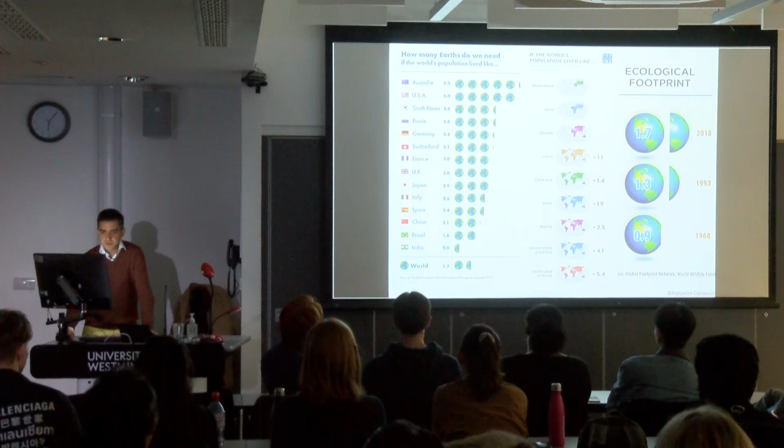That's the difficult bit here—especially if we just focus on the construction industry. What is that kind of radical change? Is being sustainable a radical change? I don't think so, because if it was, we would have been there by now. So how many Earths do we need? If we carry on like this—you've probably seen stuff like that—it's just nuts.

So where do we start as architects, as designers? It's overwhelming—there's so much stuff, so many materials, so many products out there, so many claims. How can you do the right thing?

I would suggest that the most important thing is to start from one of the most common building materials we've got on Earth, and that's actually what's beneath the topsoil. Beneath the organic soil you've got gravel, silt, clay, and sand. In a way, this is the backbone of what we should be building with, and it's critical because it's a local resource.

So our task now is to find, very quickly, various ways to produce building products out of that mass—but in a way that the mass can perpetually be reused. So you don't make a product that then has to go to a landfill, but actually keep the material in its raw state. This is a map of the different soil types across the world.

You can see the process from the immature soil, where it's like bedrock and rock, and through various processes like rain, the breaking down of the rock and the forming of all these different layers. It's a very complicated geological process—chemical, mechanical, and all sorts. But basically, this is the base, and we are working in that area, where you find your gravel, sand, silt, and clays.

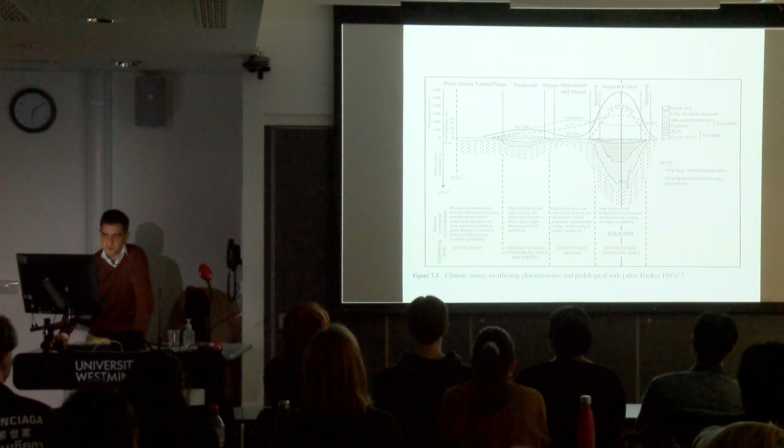Just to give you an idea, what have we got? We've got sand, which is a certain size, there's the size of the silt, and there's the size of the clay. So the clay is very, very small, but it's fundamental.

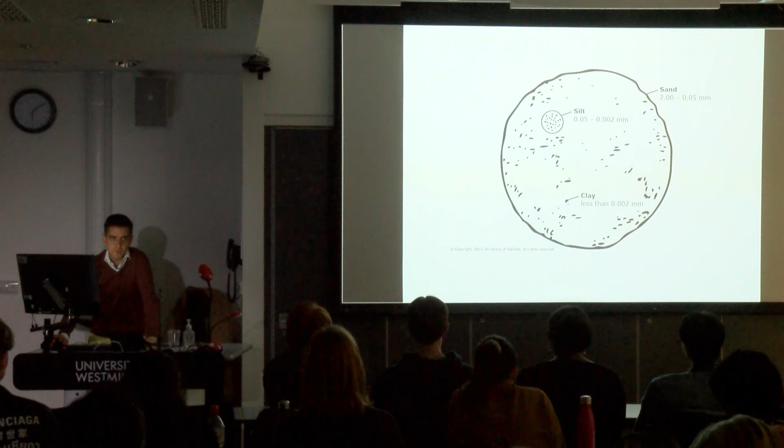That's your cement, if you like, basically. This is how you make your clean concrete. The clay is your binding agent, and it's very important. We'll probably touch on it later on, but they're very different.

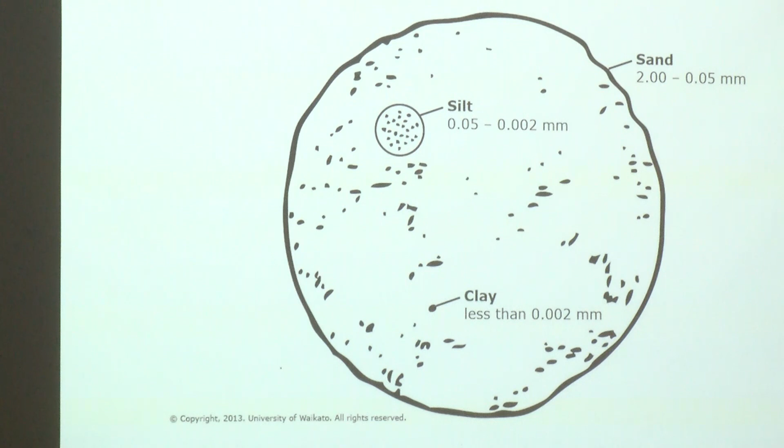There are different types of clays, and clays have been created in different ways - there are three different ways that clays are created. It's also important to think about the clays as being flat plates rather than tiny grains.

And between the plates, there is always a thin layer of water, and actually that's quite important. So there's always a kind of active element in the clay. And as they interact with other particles, they start to interlock.

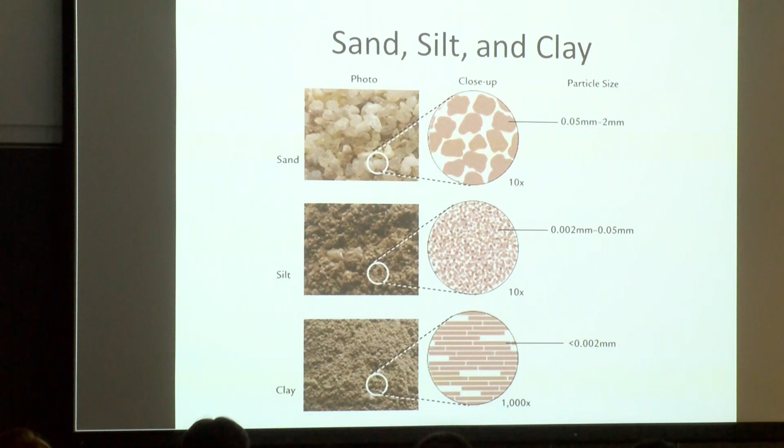So in earth construction, this is a diagram where the big round discs are sand, and these are your clays, and the bigger parts are silt - silt also varies in size.

The basic principle for earth construction, whether it's rammed earth wall or earth bricks, etc., is compacting of the voids. If you've got a pile of earth, it's got 50% voids in it as it's dug out and stacked in a pile. When we compress it, let's say in rammed earth, when we're ramming it, we go down to 30% voids. This is how we get the strength in the blocks.

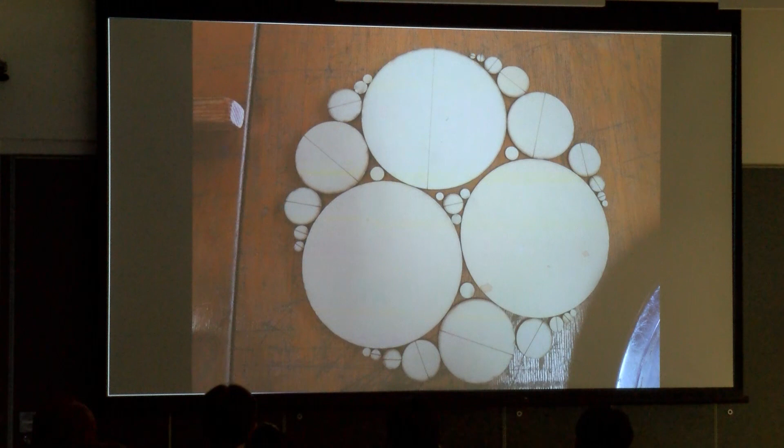So moving on to sand, and I would recommend this book to absolutely everyone. This is what you need to read next week, or this week, or tonight. It's so important - I wish I was given this book when I was in my first year, or it wasn't written back then. The title is probably a little bit misleading. I read articles about it, and then I came to purchase it and read it. It doesn't feel that the title communicates actually what it really conveys.

If you now Google 'world is running out of sand,' you find lots of articles. I think especially around 2018 there were lots of articles about it. But as usual, a lot of them are inconclusive - it's like, oh, why is it the issue, etc.

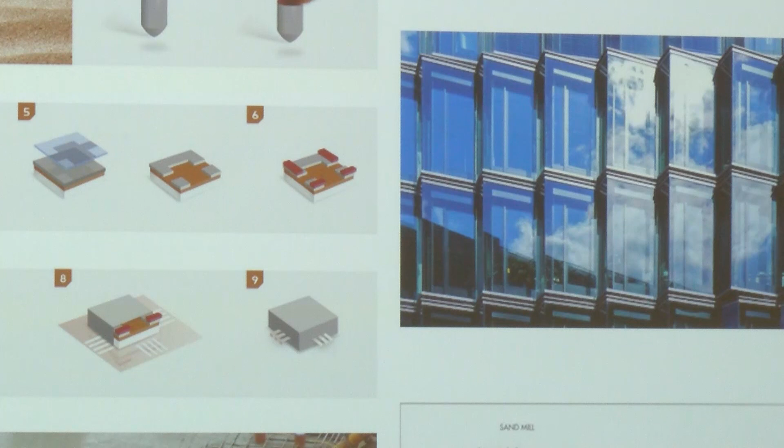Going back to the book, and that's the first chapter, the first sentence: sand is the most important solid substance on Earth, the literal foundation of modern civilization. He goes on to say basically, whether it's abrasive products, ceramics, chips, glass, concrete, you name it - everything that we touch or come into contact with has some kind of sand content in it.

So why are we running out of sand? Global use of sand is set to soar - you can see here in billions of tons, close to 30, and it goes even further. You can see actually against other commodities where we stand. It's absolutely insane, and it goes down to lifestyle.

If you think of the 1900s, the majority of the world, how people were living and what they were using - there was this kind of contact with nature, and we weren't surrounded by stuff, concrete and buildings everywhere, so they didn't have that issue.

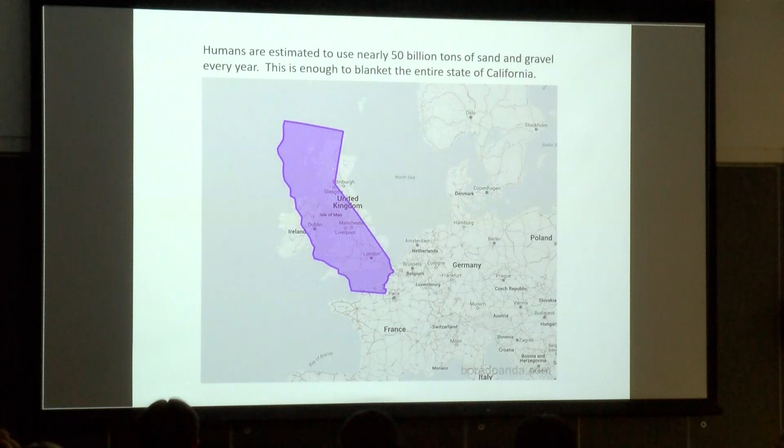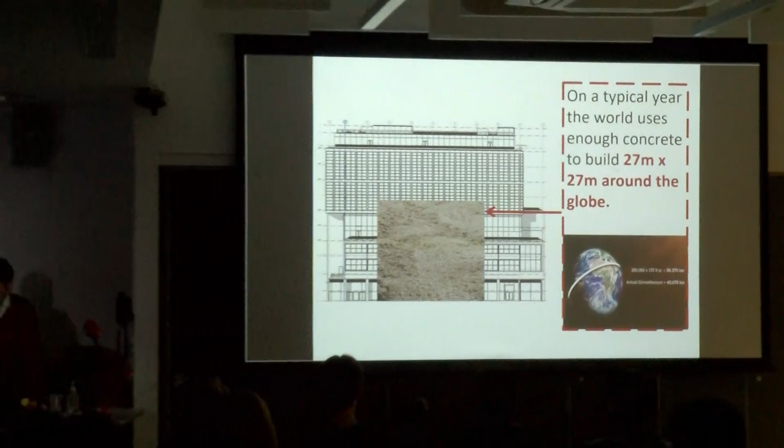But now humans are estimated to use nearly 50 billion tons of sand and gravel every year. This is enough to blanket the entire state of California - the purple here is the state of California, so you can imagine what we use every year of sand. That's the equivalent of spanning the world in a 27 meters by 27 meters dense wall of concrete every year. Can you imagine how much concrete we pump out?

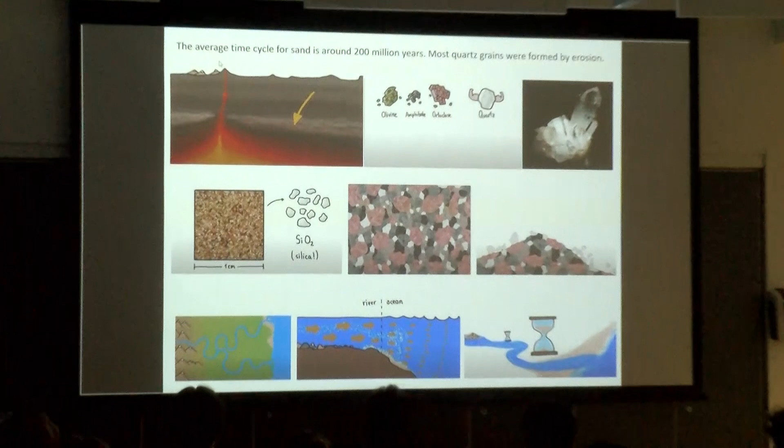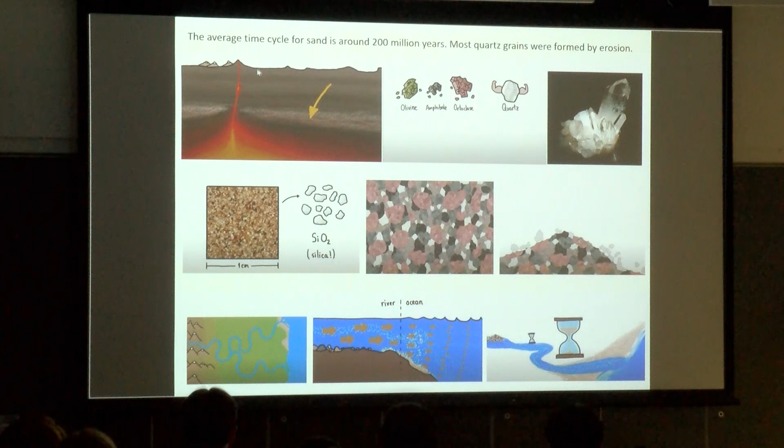Average time cycle of sand is around 200 million years. Mostly quartz, formed by erosion. You can see the journey of sand, the way it starts from the mountain, then trickles down the valley and gradually forms into small particles of quartz. It falls off a larger rock and is deposited in the valley of a river. So it's a 200 million year cycle, and we just take it and use it in a one-off way, glue it into concrete, and it's lost forever.

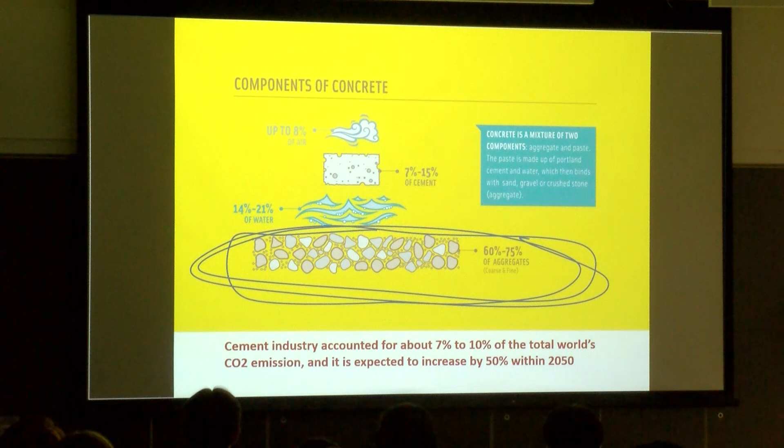There are different types of quartz and silica, different types of sands, which we use for different purposes. Going back to concrete, the real issue is the insane volumes of CO2 we emit every year.

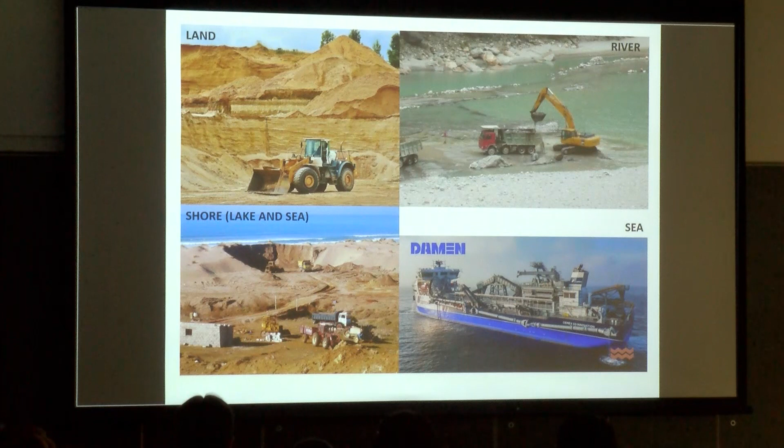Some examples of sand extraction. The sea is now very, very common in the UK, and not only in the UK. Though the supply may seem endless, usable sand is a finite resource like any other. Desert sand does not work for construction, it's too round to bind well together. So this is the current way a lot of our sand in the UK comes from, dredging the seabed with a huge hoover, which has huge environmental impacts, and the embodied carbon of running that operation is significant.

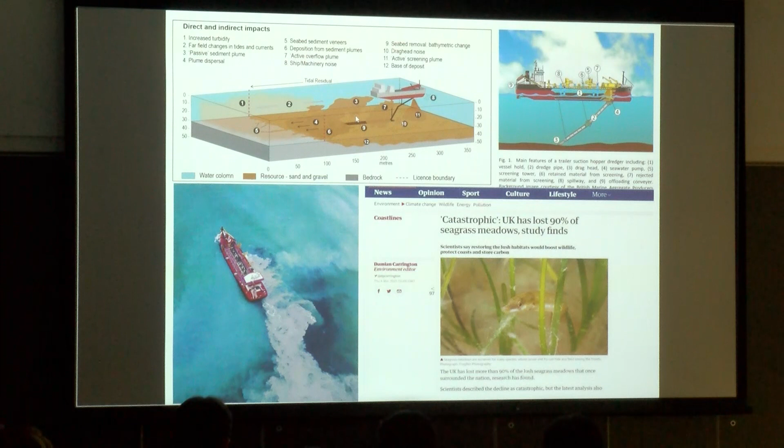At the turn of the last century, modern concrete was thought to be as permanent as the stone it mimicked. None of that turned out to be true. It's down to the chemistry of the concrete. There's an inherent weakness bound to its chemical formulation, but also the fact that you've got reinforcement inside.

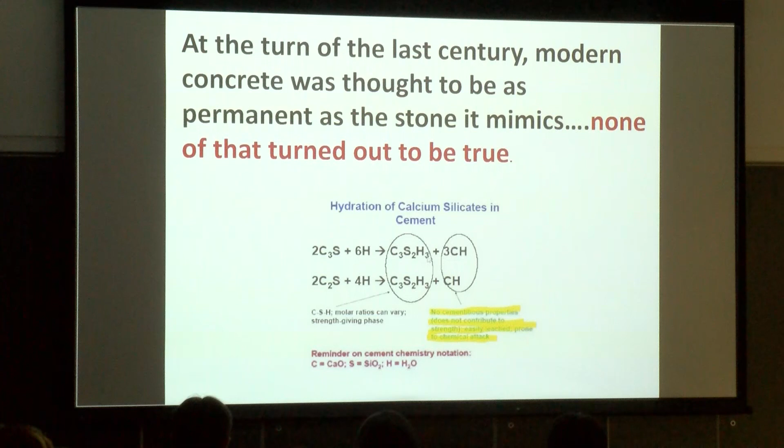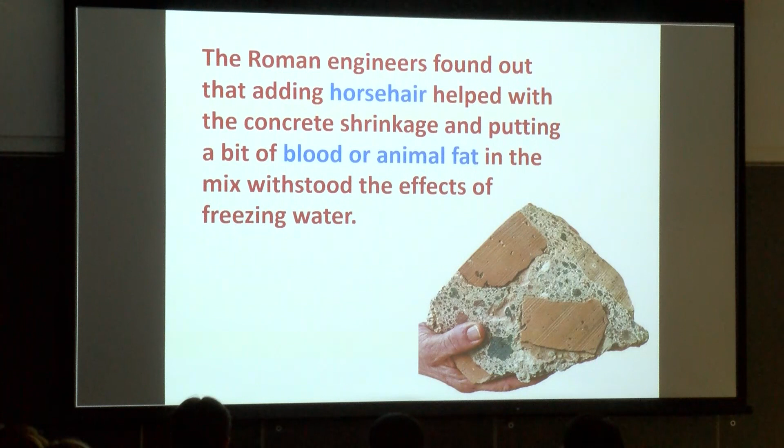When we compare classical concrete structures with modern structures, we're not really talking about the same material. The chemical makeup and the way it weathers is very different. The Roman engineers found that adding horsehair helped with concrete shrinkage, and putting a bit of blood or animal fat in the mixture withstood the effects of freezing water. You wouldn't give this specification to your structural engineer today.

Modern concrete fails and fractures in dozens of ways. Heat, cold, chemicals, salt, moisture, all attack that seemingly solid artificial stone, working to weaken it and shatter it from within. You've probably seen this weathering of concrete on bridges, underpasses and buildings. It's referred to as concrete cancer, where moisture gets to the reinforcement and it starts to rust, expand and contract, and it basically shatters.

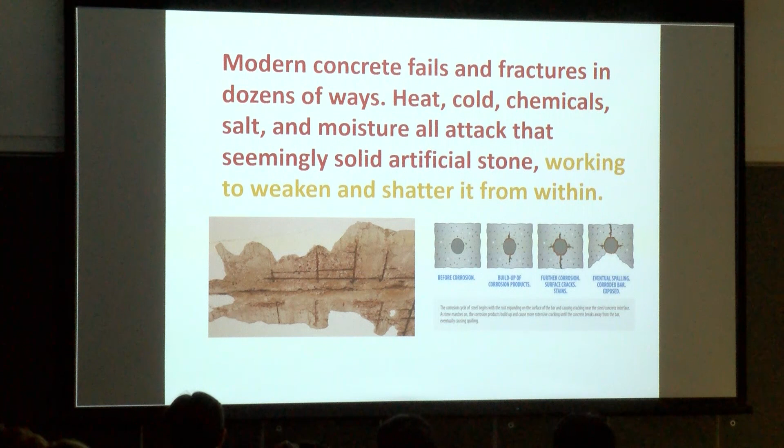The disease that will kill your reinforced concrete depends on where you live, with various examples in cold climates. These are extracts from the book, so when you buy it and read it, you'll see it yourself.

Can sand be recycled after it's been used in concrete? Yes, but you end up with a very low quality aggregate which isn't really suitable for most things, and it's very expensive.

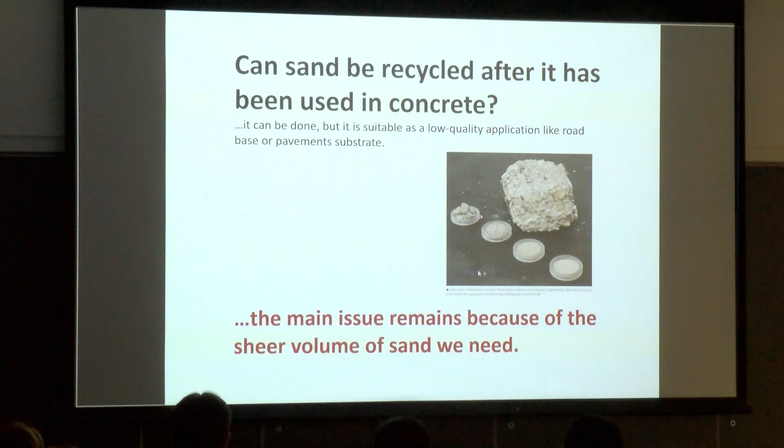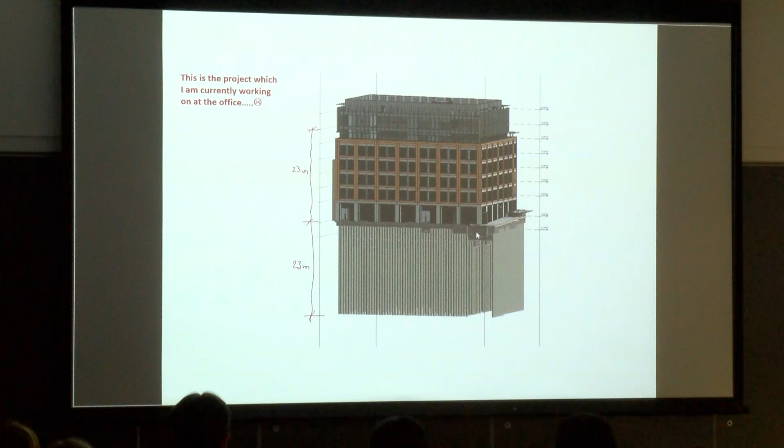This is the project I'm currently working on at the office. As I give you this lecture about not using concrete, this is what I'm currently building near King's Cross. As you can see, the foundations are almost as high as the building, and they're all concrete. Not very happy about it, but we'll come back to this one.

I want to move back a few years to 2017. I used to live in Devon, and I moved there with my family trying to do the right thing, be green and all that, had an electric car. I wanted to do an eco self-build, so I started a project to build as green and affordable a house as possible. I looked into what's available there.

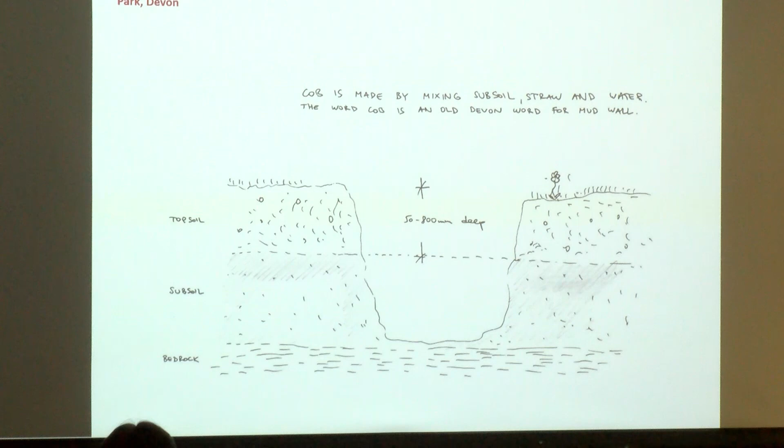You've got timber, turf, water, straw, subsoil, and then inevitably I looked into cob because cob is also local to the area. That's how I familiarized myself with earth. You find your subsoil about 50 to 800 millimeters beneath the topsoil, then mix it with straw and water, in different proportions depending on how much straw, subsoil and water you need.

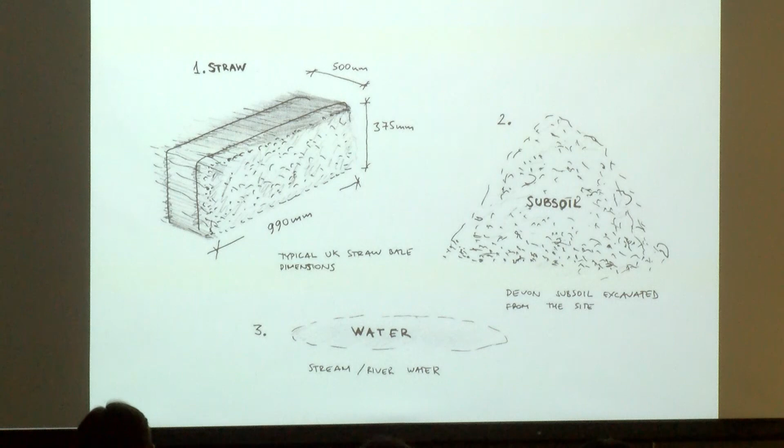Then you get into the technical details. That's quite important, because when you move away from conventional ways of building, you really need to become an expert, even if you're not one. You need to know more than the experts in order to avoid any risks associated with unknowns.

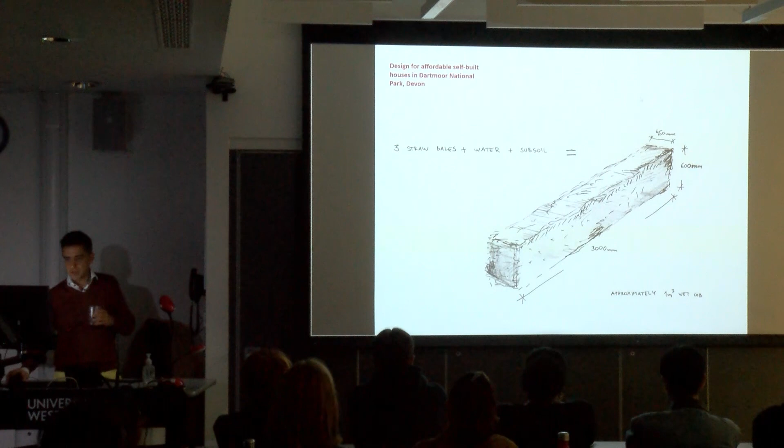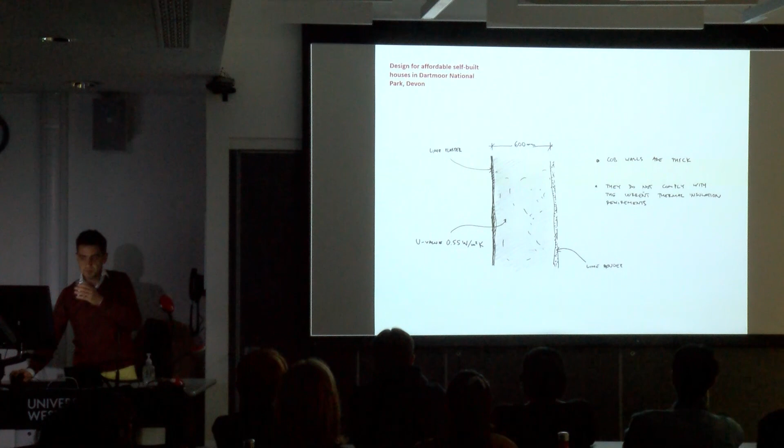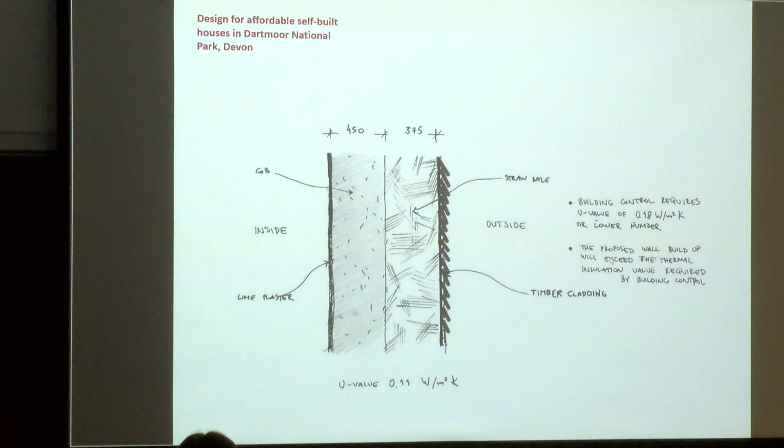So with the structural engineer, we came up with a 450 cob wall, straw bale insulation on the outside, and timber cladding. This would give us a 0.11 U value, which beats what building control wants. Then we looked at the roof, the thatch roof.

The locally thatched roofs now are too expensive. It's a fortune - you need to spend every 5 to 10 years, 20 grand or more, to replace it. We just said no. So we looked into turf roofs instead, because you can get the turf from the site, and it lasts 30 years.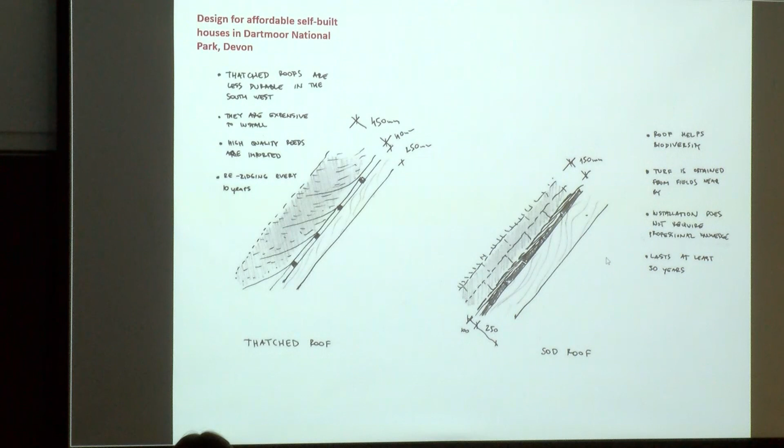Then some basic principles: obviously to keep the cob wall dry, to have a plinth, a stone plinth, so it doesn't get wet, and a big overhang, which helps with rain and also gives a bit of cover from the sun in summer, as a basic principle for the house.

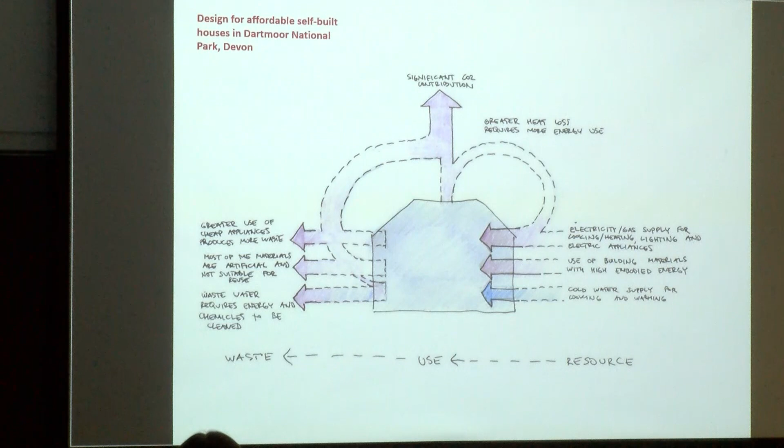Then we looked at what we typically have, like resource use and waste in buildings in terms of electricity and water, and basically just creating, in a way, pollution.

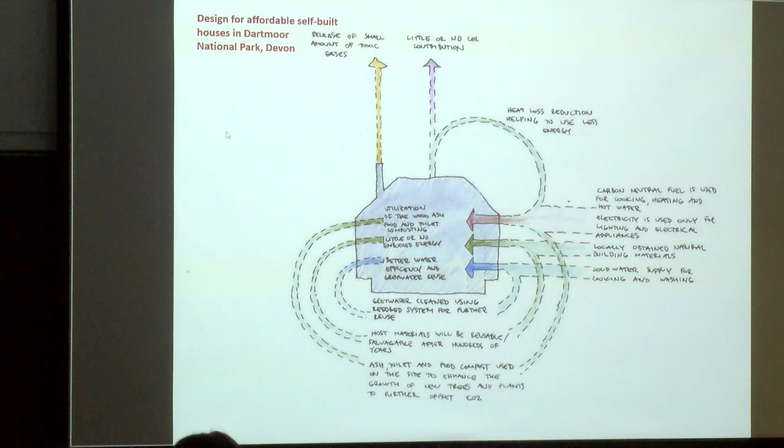So we looked at closing that loop - compost toilet, reed bed outside, and so all those things, obviously to minimize as much as possible what goes out as waste, and then either turn it back into a resource or minimize its use.

This was the plan for the site, 5 houses. So each family was to have a small plot around the house. The rest is for oak orchard - we've got orchard, oak plantation, wild meadow - so basically it's all about boosting the biodiversity.

Replanting pretty much the carbon that you've emitted. So over 30 years, it reabsorbs it through what you've replanted. And in a way, again, you balance things out.

We also had an ecologist on that job, and she did a scheme showing that by doing this on the site, you improve the biodiversity compared to just having a grass field - because of the ponds and all the things that are done and planted. So in a way, that's a benefit as well.

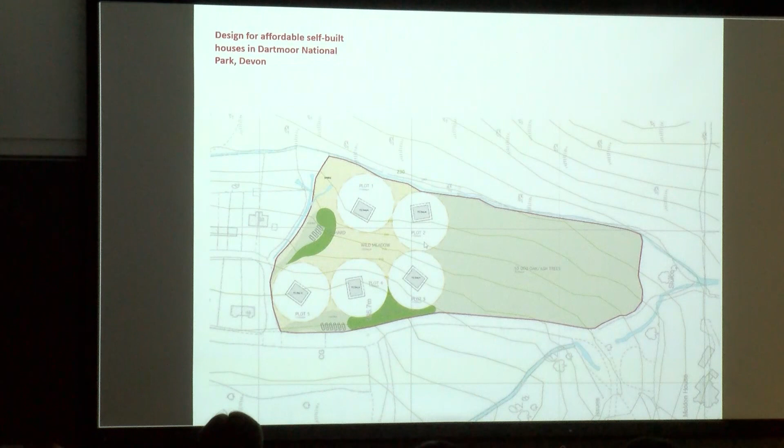But we went to pre-app. Then the planners stabbed us in the back, and then the parish council also stabbed us in the back, and that was when we decided to come back to London.

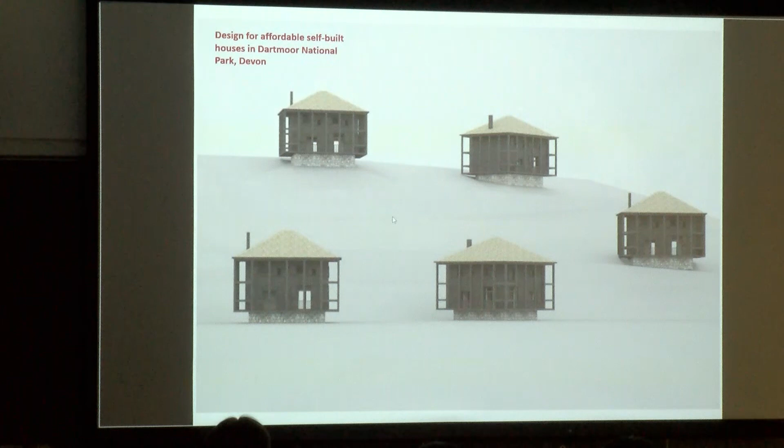That was the diagram of what the house would look like.

Is earth construction scalable? I'll show you another competition I did a few years ago for a university building in Sofia. With the engineer, we looked at the soil beneath the excavation, and it was good for rammed earth, so we wanted to do rammed earth walls, attached to a superstructure which is timber, glulam timber internally.

And then we had a proposed reed board insulation and earth screeds as well beneath the floor tiles everywhere, so again minimizing the use of cement-based materials.

That was interesting, actually. That competition, we came fourth, but then the first three should have been disqualified. But then it was Bulgaria, so it didn't matter.

So we didn't win. I'll show you another competition, which I did with Atelier 10 and Expedition Engineering. So this is for an art gallery in Finland.

Here I would like to focus on the fact that the way you design for regenerative buildings has got to change. You can't just use the same design methodology as modern buildings, the business as usual approach. It's different - you need to first design the material system for your building, then start shaping things out, and think of what can go where. It's very different than coming up with some idea, some shape, and then trying to plug things in.

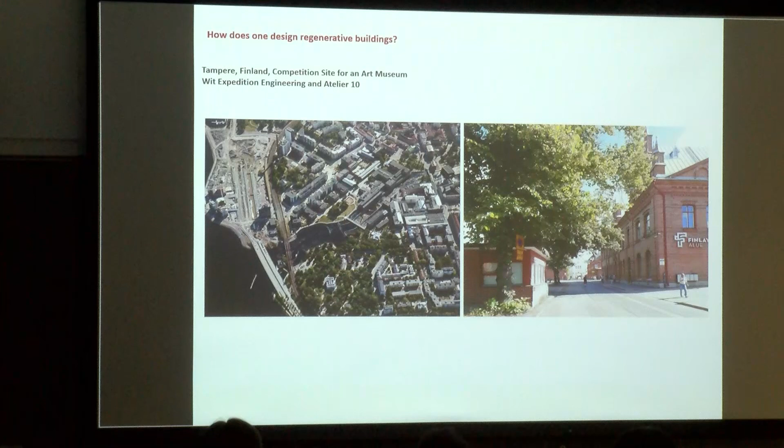So yeah, that's the site. We looked at the site. Tampere is located on an esker, which is between two lakes. The soil - esker is where glacial water carries sand and gravel. We tested from the available information, looked at the sand and the gravel there. It was good for earth construction.

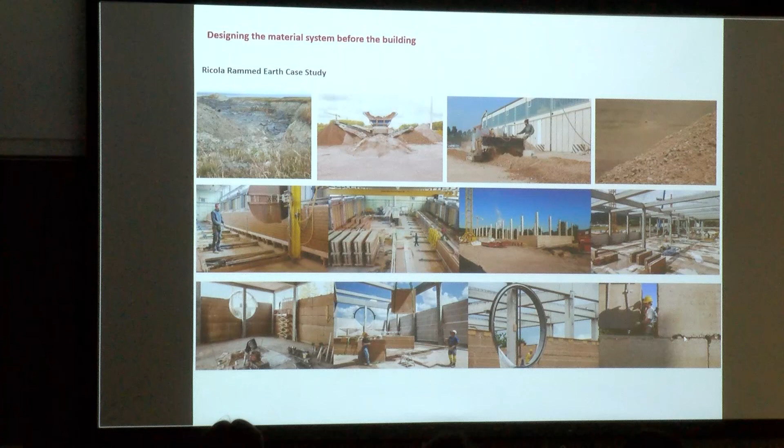So we wanted to do basically what Martin Rauch does - if you don't know him, look him up. He does amazing work, he's got this mechanized way of making rammed earth panels. We proposed the same methodology and same kind of use of material. You make about, I think, 450mm thick round panels that are lifted into place, and then you close the gaps with earth mortar, and they mostly disappear.

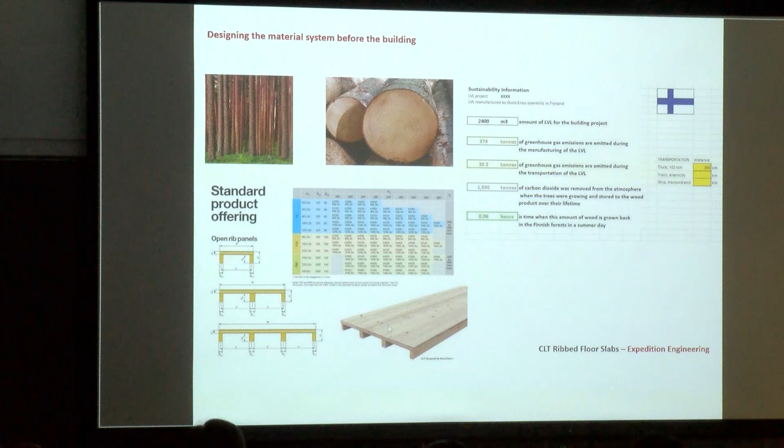Then for the superstructure and for the floors, we looked at ribbed panels, which are better than CLTs because they're more efficient. We saw what spans were possible - I think about 7.5 meter spans. And then also for the foundations, round rock with a vibro system, rather than concrete.

For the insulation, we proposed these structural panels made of hemp and resin, which actually aren't available anymore. Post-Grenfell, they're no longer on the market because the testing regulations for fire are now so insane that even sensible products can't make it. Just because it's got resin, it's too much of a composite material, and companies can't afford to do the tests every few years. But anyway, that's what we proposed back then. The insulation levels were very good, and carbon-wise it's also very close to zero carbon.

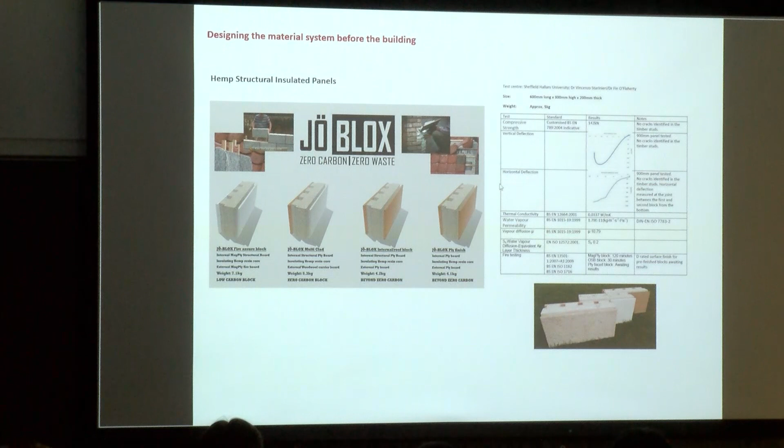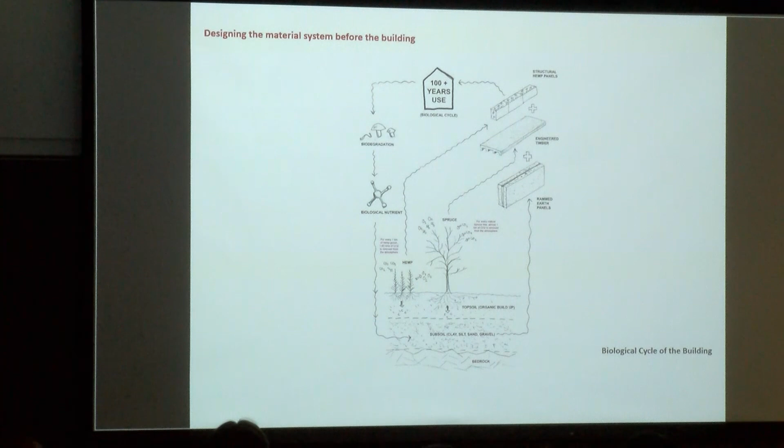So that's the diagram of resource-based design - you design your material system before the building. You find your ingredients, your components. The whole idea was that they're either biodegradable or the resource is retained within the material for further reuse. For initial sketches, as I said, really without even thinking of program, just to see what you can do with that material system in a reasonable way - in terms of plan, sections, and spans.

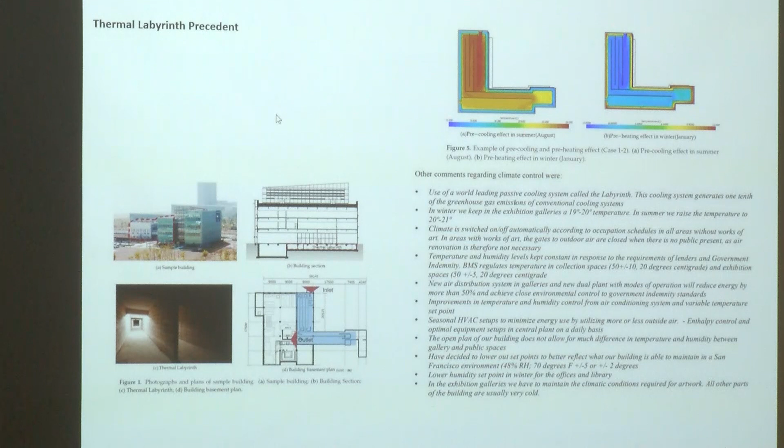Then Atelier 10 proposed thermal labyrinths beneath the ground to cool and heat the air in summer and winter, in order to minimize energy use. We also looked at making soffit panels out of earth as well, which help with internal humidity and also reduce carbon.

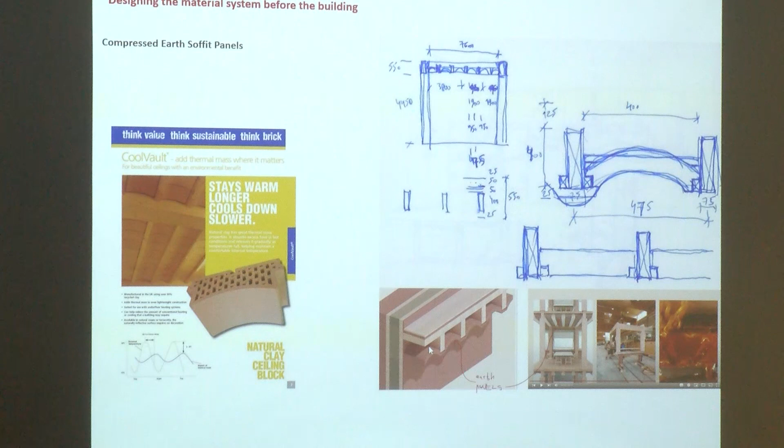So that's a plan view - you've got your rammed earth panel, you've got the hemp panels, which are sandwiched between timber. That's the section, and this is how the floor connects with the ring beam, and this is a cross section through the floor with the soffit panels. So that's all your components for the wall and the floor.

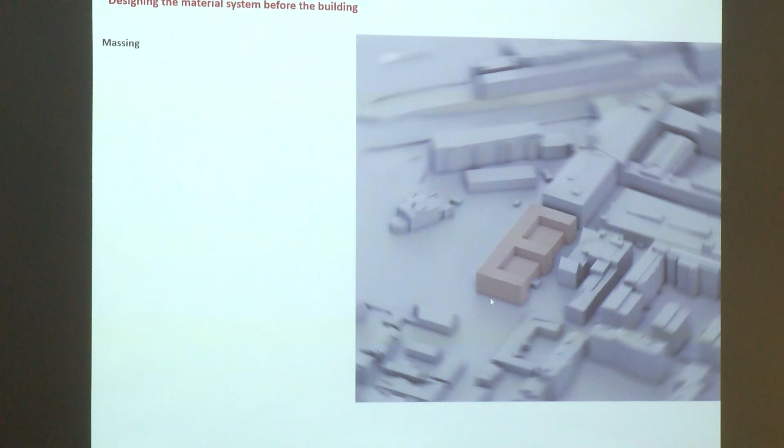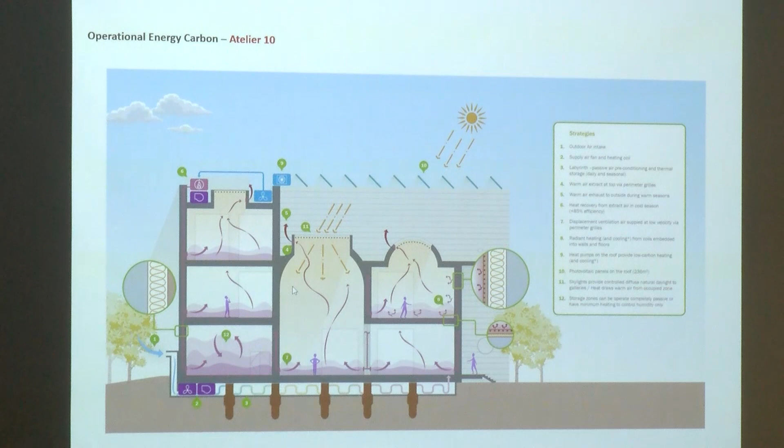And this is Atelier 10's diagrams - again, they did really well. Air comes via those labyrinths beneath the slab, it's distributed internally, then it's captured and recirculated again, with the heat recirculated. So that's their summary of the scheme, but it performed really well - very low energy demand, etc.

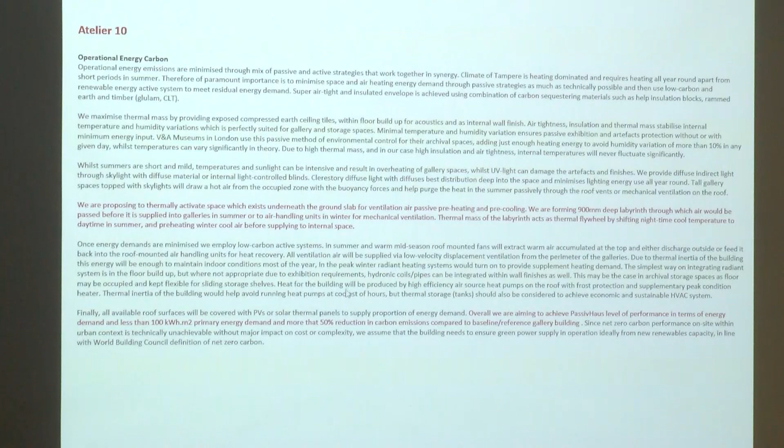So this was their carbon analysis - you can see basically here, from the 417 kilogram of CO2 per square meter, the percentages of where the carbon is: 3% for the PVs, 22% for the CLT, 15% for building services, and you see 4% for the local rammed earth facade.

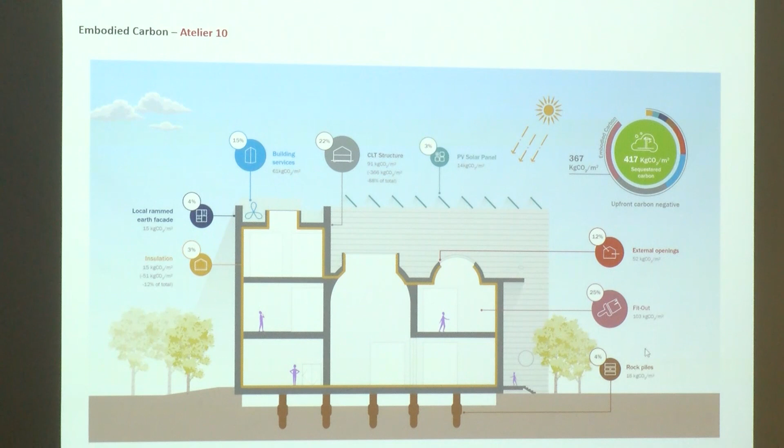That's what we were just saying, it's so important to bring earth products within your building. Here's 4% rock piles - usually the majority of your carbon is in the superstructure and foundations.

This is again the summary of the carbon. The shocking thing was that after all that, we came out at B. This chart shows A++, where we should be kind of zero carbon - the new building should be here. But after all this, you still come out at just about A, between A and B. So you can imagine business as usual buildings, even with their claims, where they venture, and how much further everything needs to be pushed to get there.

So that's very important to keep in mind - even if you do everything, and this is really pushing it, that competition entry was really pushing it within reasonable limits. But it's a hell of a task.

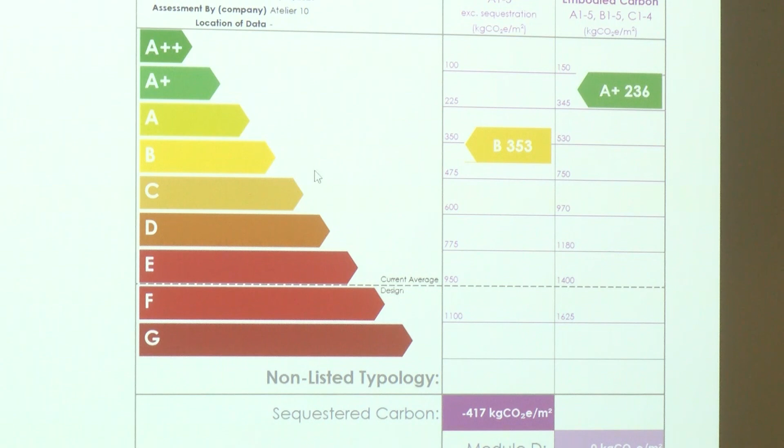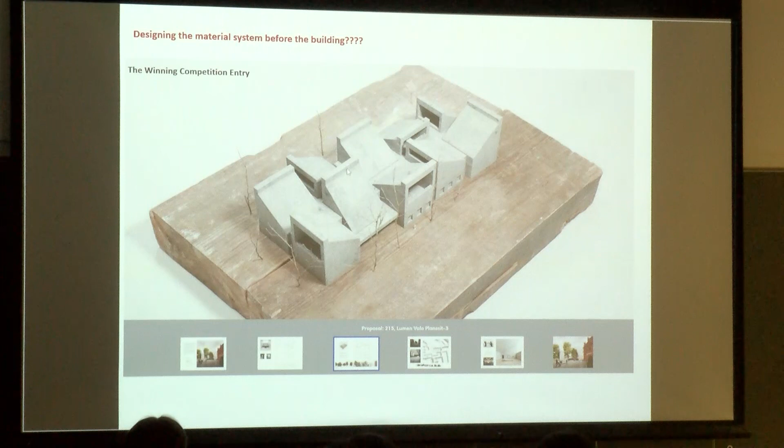This is the winner of the competition, and you can really see it - I kind of just imagine concrete bunkers. There's not many materials you can make this of, and the whole aesthetic was really based on this kind of concrete, which is a real shame. I think our competition entry did really badly, actually - from 500 entries we were probably 420. I don't know, but never mind.

So back to the project I'm currently working on. What can you do? What can you do in order to get there or start going in the right direction?

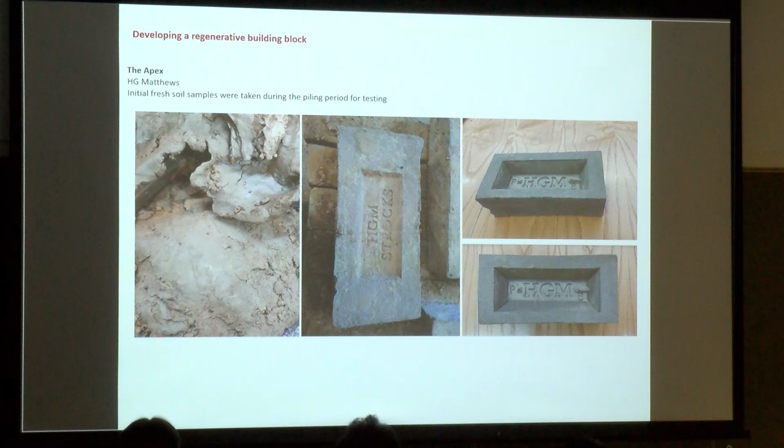Going back to the earth and doing the site investigation, seeing what type of earth we have and what we can do with that - we can make blocks. So we've got some concrete blockwork in the basement, and we want to replace it with earth blocks made out of subsoil from the site in King's Cross.

It was a long journey. I first had contact with Rowland Keable, an earth construction specialist. He said go to your contractor and just, as they're piling, ask him to give you a few bags of freshly pulled clay out of the ground, which is really unusual of course. So I did that, and they were quite amenable. I said okay fine - it was a bit weird.

So he gave me the soil, and I sent it to him. He made a small brick. Then we showed it to the client, and they got excited. But the first reaction was, can we sell it? So we said no, look, it doesn't work like that - it's about building on site, etc. So we're getting there.

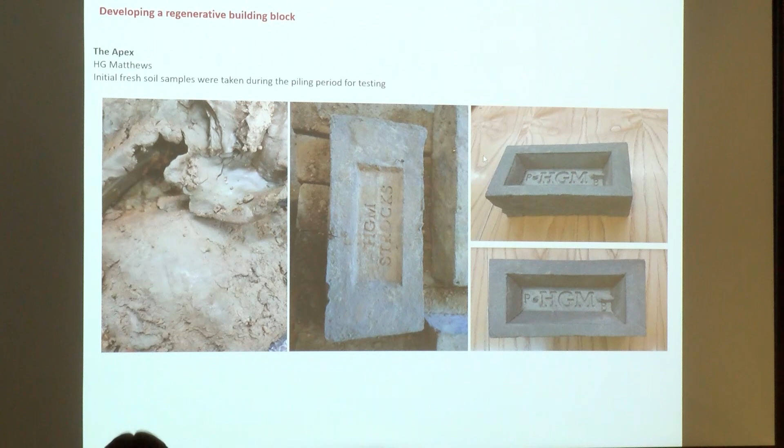It's kind of moving on, and it looks like it's going to happen. So in the basement we've got this orange wall, which goes all the way around the perimeter wall - it used to be concrete blockwork, so now we'll have earth blocks made out of subsoil from the site.

We've already sent the amount of excavated soil we need to the block manufacturer, and they are soon going to start producing blocks. This is what we had before - we checked U values, and it looks like actually the earth blocks are performing better.

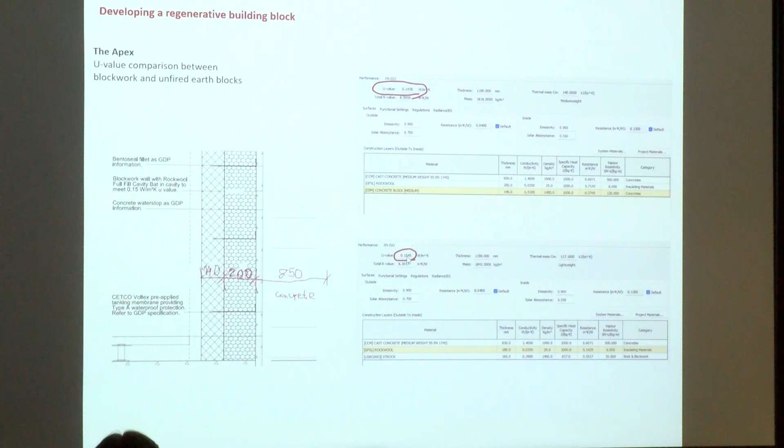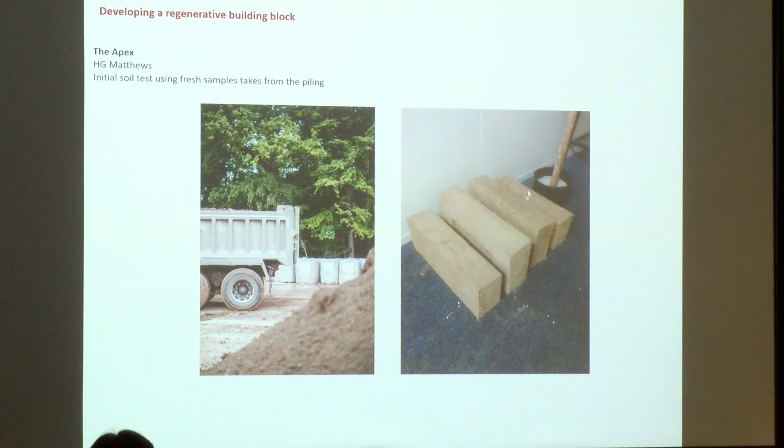These were pictures of the soil being taken away in trucks to go to the block maker, and then sample blocks being made. Starting to go back - a 30-mile journey - then making it into blocks, going to the building, and then perhaps one day they can either turn to ground or be used in another building. The resource is not used up; it's in its kind of pure form.

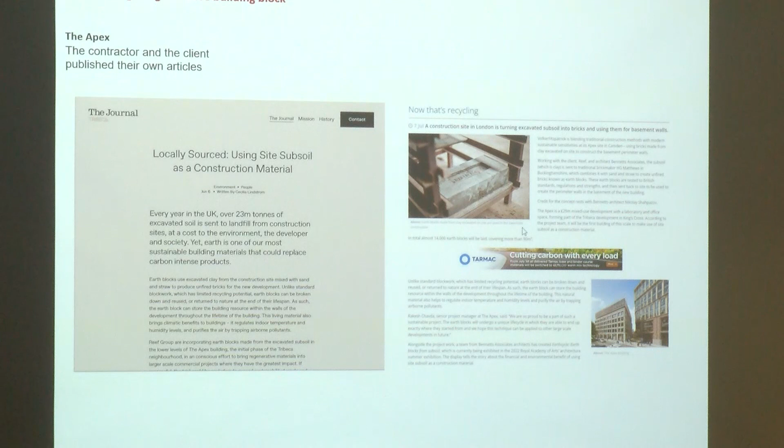So the client ran an article on it - they were quite pleased, even before we actually pressed the button on it. The contractor also did an article on it as well. We made a submission to the Royal Academy Summer Show, and we were selected, so we made a display with the maps and everything else.

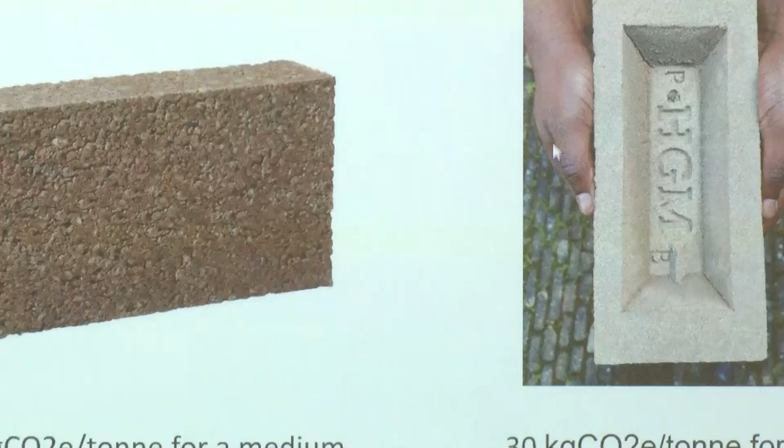So yeah, anyway, hopefully we'll get there. But it's a long journey. And this is basically a disc made out of elephant dung with lime. Again, how many elephants do you need in the UK to build with? It's completely insane.

The problem is that the whole thing about environmental design is being dragged into this ridiculous conversation about things which are really out of the question. And in a way, they divert from things that are really credible and simple, unfortunately.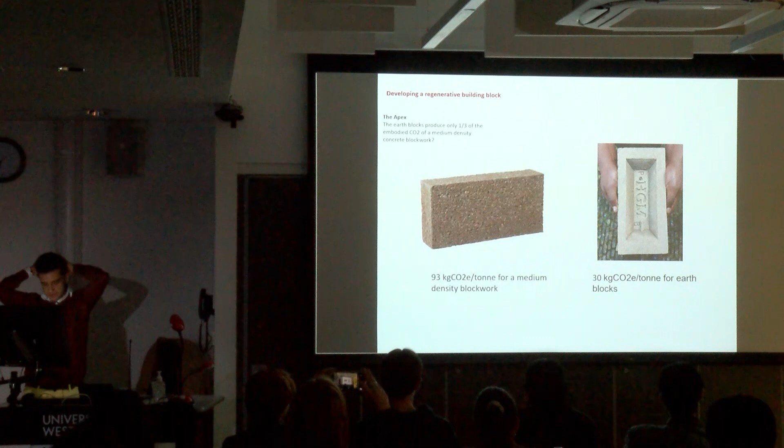So, going back to the earth block, I had a really difficult task to find a way to calculate the embodied carbon of it against concrete block work. The reason for that is concrete block work is part of a very big industry, and also the cement industry, which is part of that. There's so many ways to double account or hide figures.

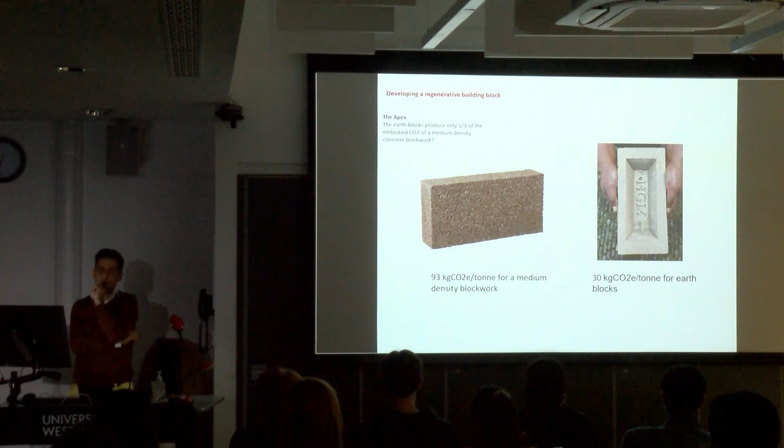They come up with a figure which, when you compare it with something tangible - dig the soil from here, drive it 36 miles so you know how much carbon you use, make it into blocks so we know how much carbon they use to make the blocks, and bring the blocks back - we're coming with a figure that's just a third better than concrete, where the sand comes from the sea, the cement comes from all over, some components from quarries, etc. The cement also emits a huge amount of CO2.

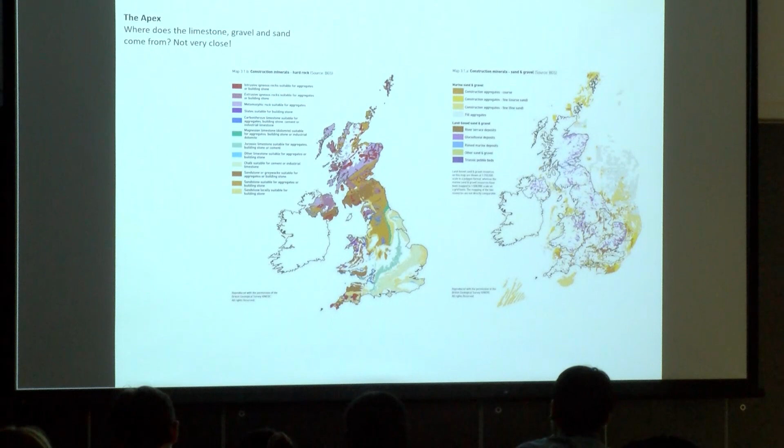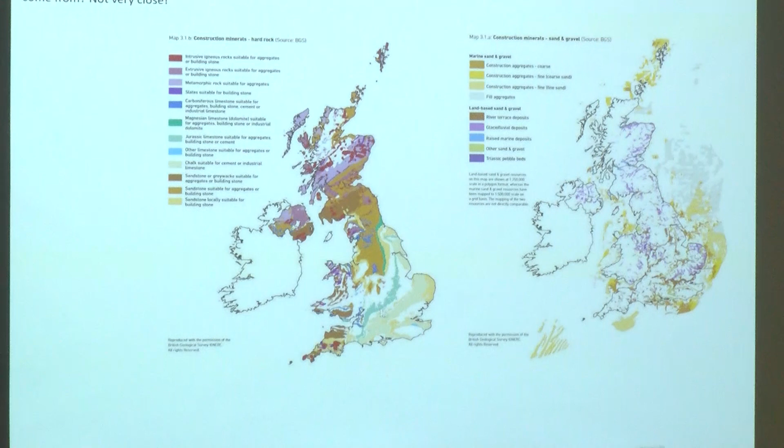So, after a crazy amount of calculations and conversations with various engineers and specialists, insane comparisons and all that, we came up with a figure which now is far, far closer. This is just a map of where all the ingredients will come from for the cement and for the block. So we're talking about a journey which is 36 miles, to basically a journey that could be hundreds of miles, and they're just saying it's a third.

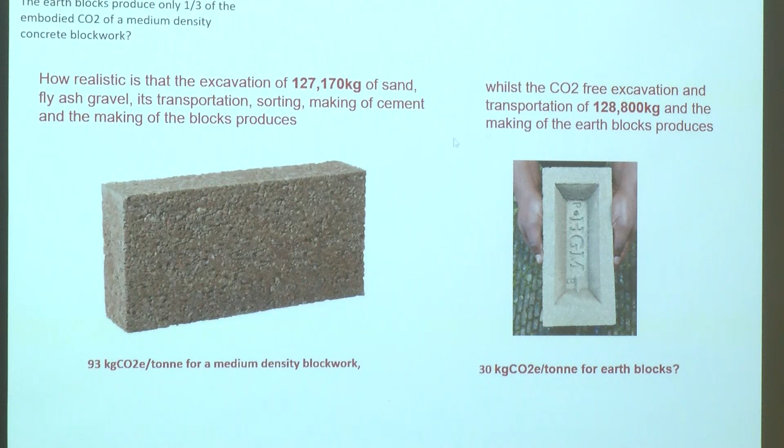But yeah, this is again showing the cycle, the different comparisons between the blocks and how much tonnage of material we will have on site, etc. But the important figure is that it's...

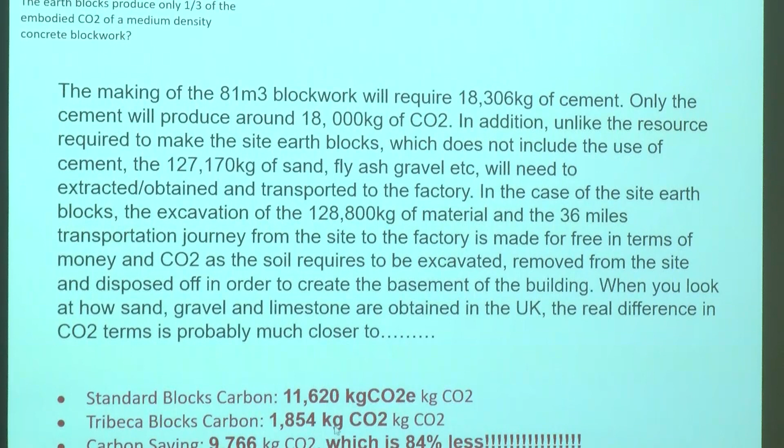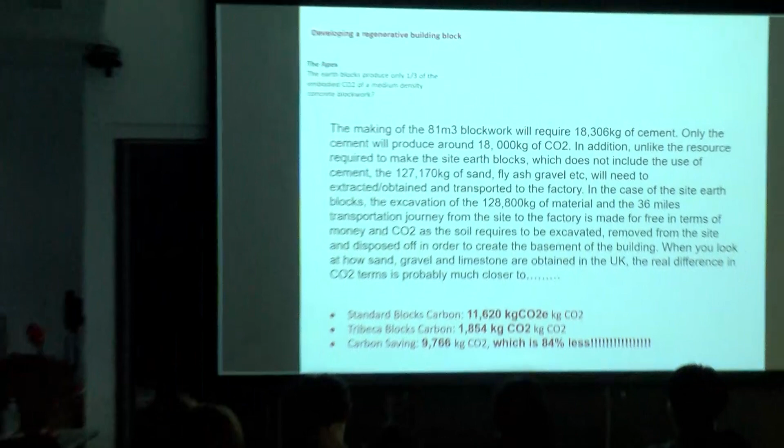1,854 kilograms of CO2 against the concrete, which is 11,620. So finally we came to a figure which is much more realistic. Again, you had to go through so many documents and have really difficult conversations with so many people. And then it's about probably between an eighth and a tenth of the CO2 of concrete blockwork. So you can imagine, that's more radical, that's more likely. If we need to reduce the emissions that we're creating from the materials we are producing, this is like - if everything comes down to a tenth of it, we're getting somewhere.

So, the best way to understand the difference between business as usual and regenerative architecture is by reducing the process of designing and building to its core fundamental materials, i.e. ingredients, which are used in both cases.

I think this is really important. So in your designs and in your work, you need to question everything that you put in your scheme. Where does this come from? What kind of emissions does this create? What kind of impact does this have on nature, on the environment, etc.? And then choosing your ingredients, to start building up your project or designs. But without doing that, without interrogating each one of your main material blocks, you can't get anywhere.

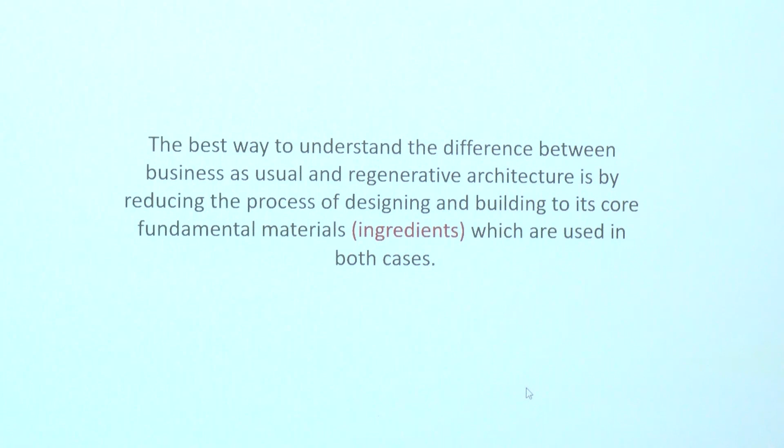We know where we'll be heading if that happens. Only when the core ingredients are clearly identified and the environmental impact is understood can we be certain if the design methodology we use when designing a building is suitable to address the climate crisis. So that's again what I just said - that's the most important thing.

And this is why, for example, on the King's Cross project, it looks simple. Oh, it's just a block. Oh, it's just - you've got the foundations - but that's important because that's one of your ingredients. You need maybe 20 or 30, but that's one of them. So you can get there. You can get one, and then afterwards you can move to foundations.

We've got now solutions for foundations as well. And we can persuade clients, and we can make testing, and move to cladding. So that's very important - not to miss the opportunity to focus on the key elements.

Both the cooking and the building ingredients are part of a production system which leaves its traces on the habitable environment. The comparison between cooking and designing a building is very relevant in this case. If you want to eat well, and if you care about the environment, and if you want to understand where that food comes from and what impact it has on the community or the environment, then you can carefully select your ingredients.

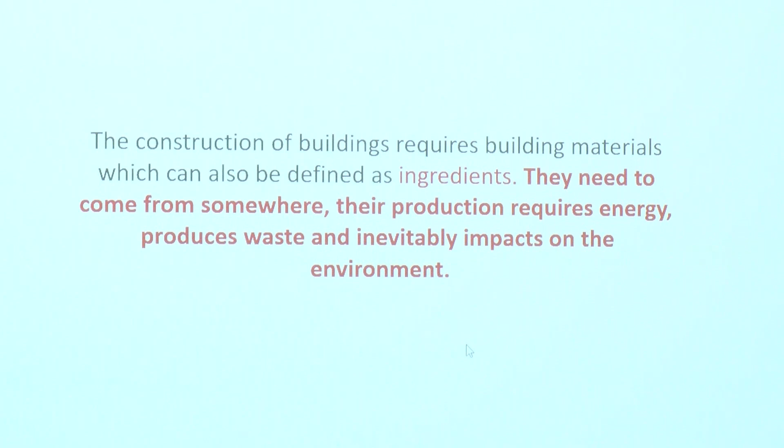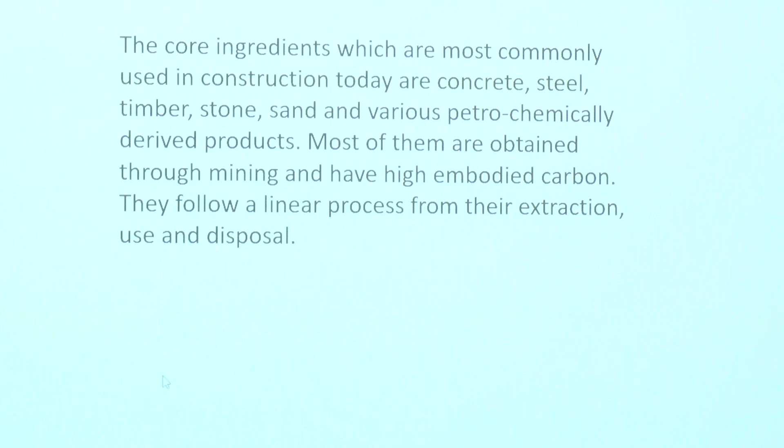The core ingredients most commonly used in construction today are concrete, steel, timber, stone, sand, and various petrochemical derived products. Most of them are obtained through mining and have high embodied carbon. They follow a linear process from extraction, use, and disposal. So once that product reaches the end of the life of the building, there's no resource, very little value in it, and most of them go to landfill.

So when it comes to ingredients, you've got to question that afterlife of the material, that other journey. You can't just specify materials that cannot be reused, because, for example, this is not only a broken tile - you might say the tile can be reused. Well, to a degree, but after a while they start to wear off, start to chip. This is also clay and sand, sealed, lost forever, because it's been baked, which has also emitted emissions.

So again, can you create a roofing material that doesn't need to be baked, so it's not going to waste, it's not going to lose a valuable resource. That's also very important to take into account.

The core ingredients of regenerative architecture are plant fibers, timber, clay, silt, sand, and rocks. They're obtained by growing them or mining them. Unlike modern buildings, the created resource is used in its raw form and is retained within the building as resource for future reuse. Think of your building as storing resource for future reuse, and storing it in a way that can be reused.

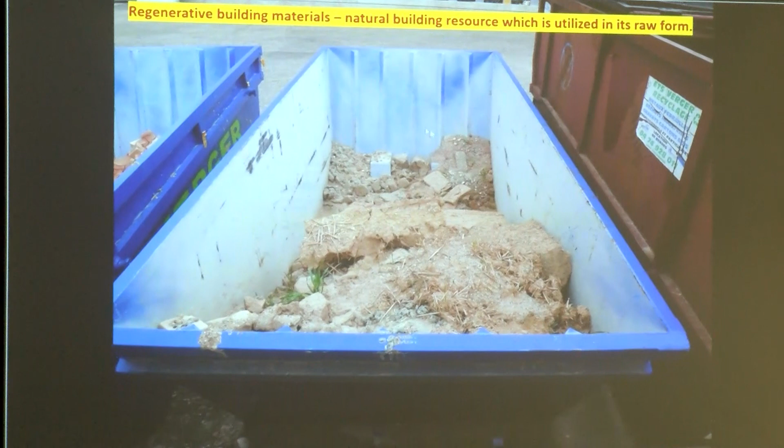So yeah, this is basically the end of the journey of your earth-based materials. They can gently go back to ground without any detrimental impact on the environment, and of course with a fraction of the CO2 that other materials would have created.